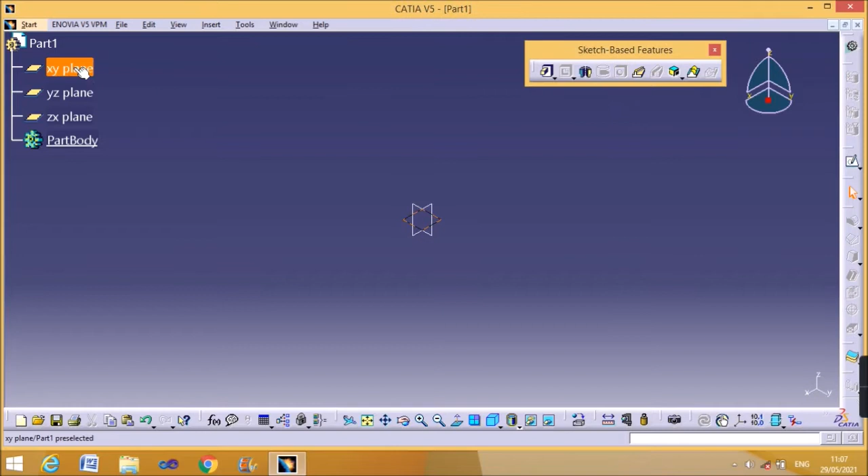XY plane, go to sketch. I will draw a rectangle here. I'll exit it. I will pad it to an extent of 20 mm by using mirror extent. Preview and then OK. I will fit it to get a clear view of it.

So if I want to draw a hole here, if it is a normal pocket or a through hole, you can use pocket. If it is specifically given in your drawings, that is it is M16, M12, M6, that type of specified hole, you can use this hole command to draw it.

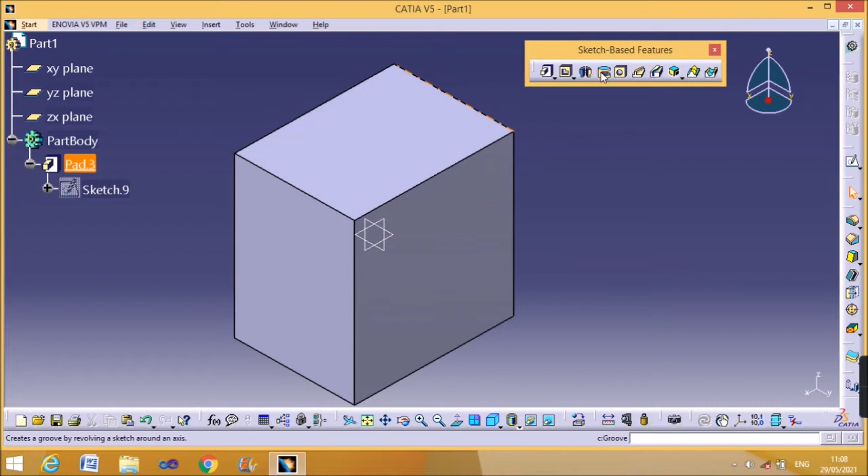The previously used commands, you have to draw a sketch and then use these commands. For hole, you don't need to draw the sketch. Just select hole and select the surface on which you have to give the hole or draw the hole.

I'll select this command. Okay, so I want it in the middle, I want it at the origin. So first what we will do is positioning sketch.

Click the positioning sketch. So this is your hole. You have to place it in the middle. Go to constraint, double click on it, click the point and then the vertical axis.

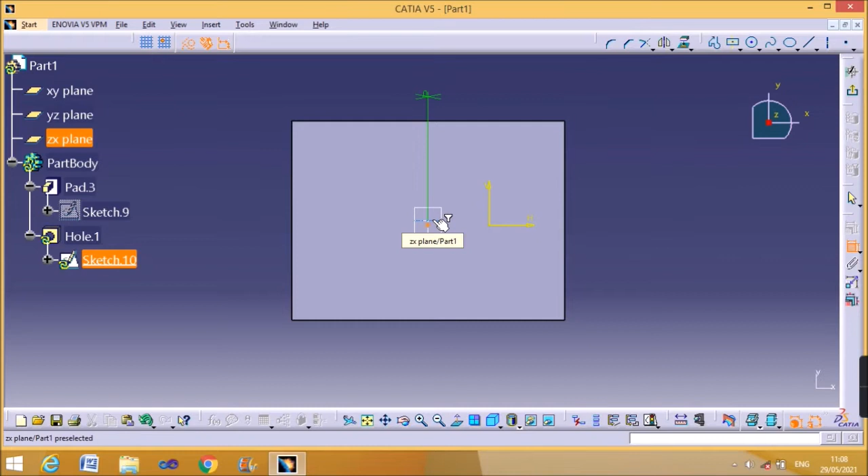So the dimension, change it to 0. Again click on the circle, click on the point and then on the horizontal axis. The dimension is 0.669. Double click on it and change it to 0.

Now it is placed exactly at the center. Now exit this. So if you want a blind hole extension type, this is blind hole. You will specify the diameter and then the depth. I will give the depth as 20, and then preview. So this is the blind hole.

You can rotate it and see. To get the normal view, again isometric view and then fit it. You can zoom in and zoom out also.

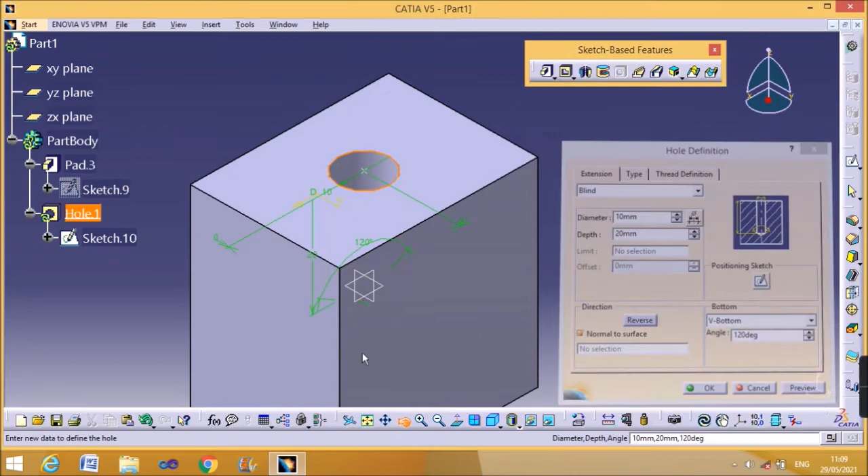So this is a flat bottom. If you want a V bottom, you can change the bottom to V bottom. See, you can see the preview here, it is V bottom hole, and then preview. If you want to rotate, you can see it by rotating it as V bottom.

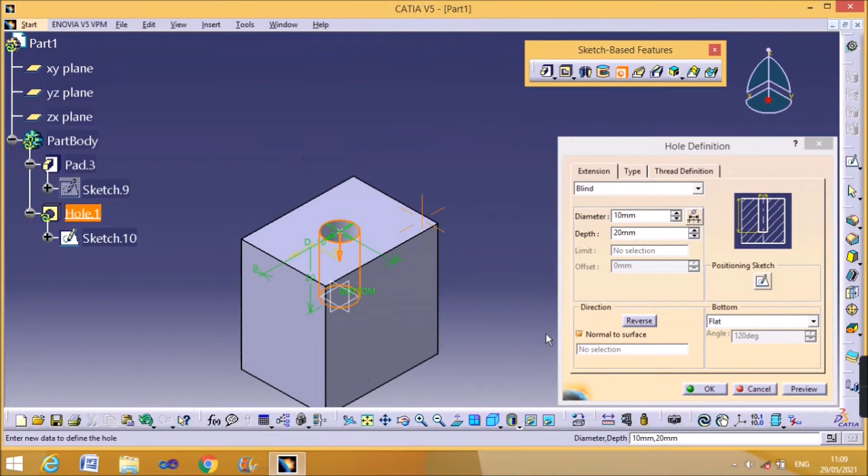Next is type. Now this is simple type. You can change V bottom again to flat bottom. Now this is simple type. Type simple. Next is tapered.

In tapered you specify the angle, 45 degree, 20 degree, whatever you want as per your drawing specifications. You will specify the angle, the depth again you will give in extension, the diameter, the last diameter, and the depth you will again specify in extension.

Next type is counterbored. See here it is shown in yellow dimension. Here only the yellow dimension you will give. The diameter I will give it as 20 and the depth I will give it as 5 mm. The upper hole, that is the diameter is 20 and the depth is 5.

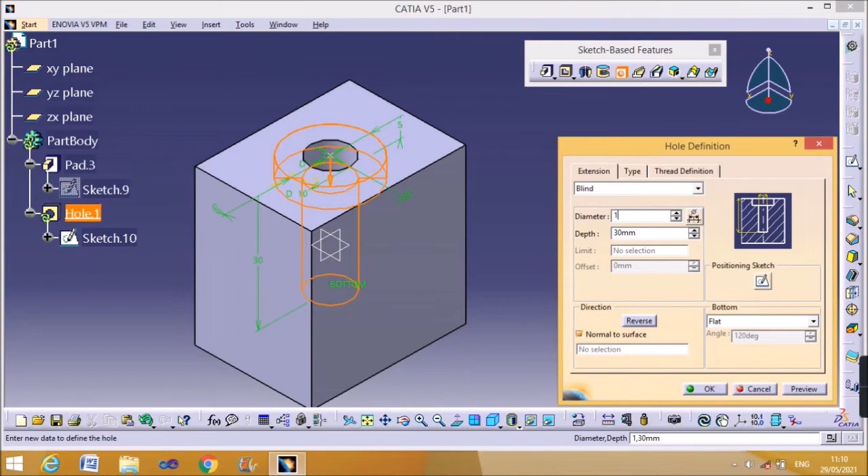The below extension is again given in extension. See here yellow it is defined the dimension. The overall depth I will give it as 40, or I will give it as 30, and the diameter I will give it as 10. So this is type counterbored.

In countersunk, again here you will specify the depth and angle. There are three types: depth and angle, depth and diameter, angle and diameter. What is specified here in the yellow dimension line you will specify here. The extension again you will specify here.

Next is counter drilled. Counter drilled you will specify diameter, the depth and the angle. The remaining extension you will specify it here. Whatever you want you can specify here.

The next is thread definition. If you want threads in your drilled hole, and in the drawings given they have specified M16, M12, M6, for that you will tick on the threads.

You will select the second one. In the type, you will select metric thick pitch. I repeat, metric thick pitch.

Now you will select the threaded description. If you want M12, M10, automatically the hole diameter and the pitch it will take. You have to just give the thread depth and the hole depth.

See, in the specifications, in the standards, they have given yellow. This is the hole depth and this is the thread depth, for what extent your hole depth should be, and what extent your thread depth should be. You will specify here. I'll give it as 20.

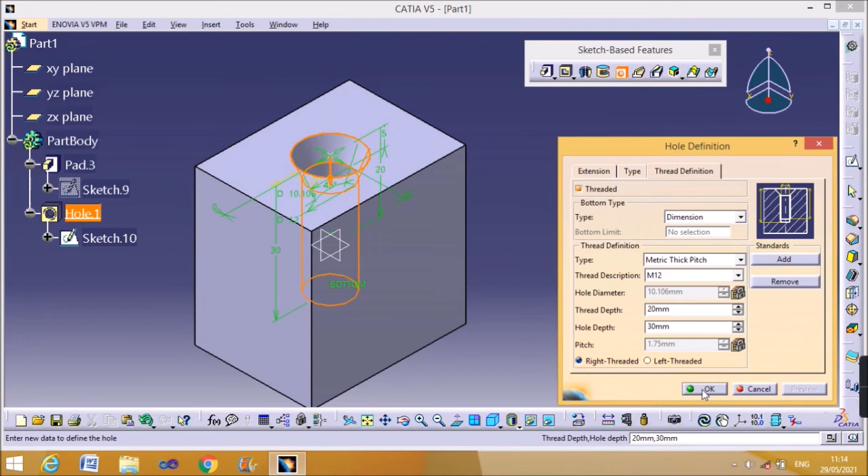The threads will not be seen here. When you do drafting, you will get to see the threads. Double click on it. In some cases, in the drawing there will be given M12 into 6, M12 into 5.

For that, you will again select the first one, metric thin pitch. So if this type of thread description is given, you will use metric thin pitch, or else you will use metric thick pitch. Metric thin pitch, you will select M12, M6, whatever specification is given in the drawing, and then you will specify the dimensions, and then press OK.

Like this, you can draw a hole. Remember, if you want to draw a pocket or a through hole, you will just use pocket. Hole is only used to draw a hole which is threaded, with specification given as M12, M6, M5, M10, anything. For this, you don't need to draw any sketch.

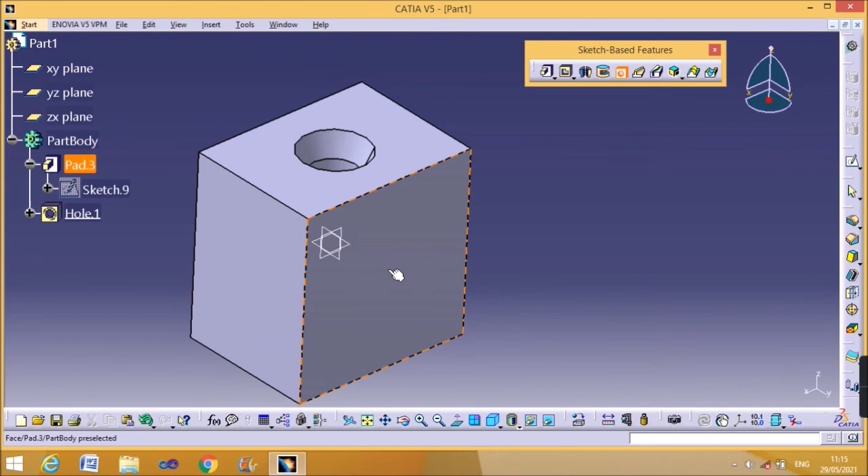You just select hole, and then you will select the surface. First you will go to positioning sketch, position the sketch, and then you will select type and then the thread definition. By doing this, you will get a hole of desired specifications.